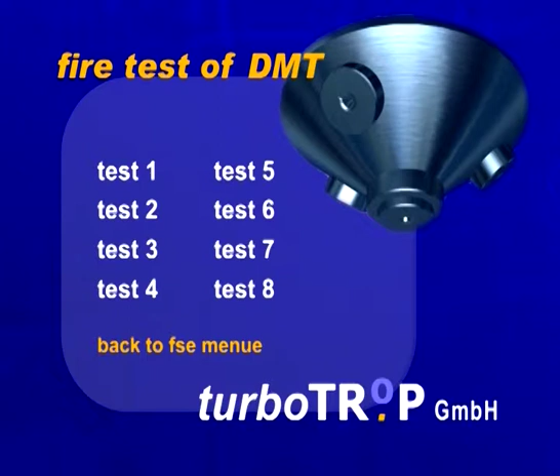The system that can save life. Several companies already decided to adopt our solution. Let yourself be persuaded that the fire barrier and smoke gas reduction with our fine spray extinguisher will be the decisive technology of the future.

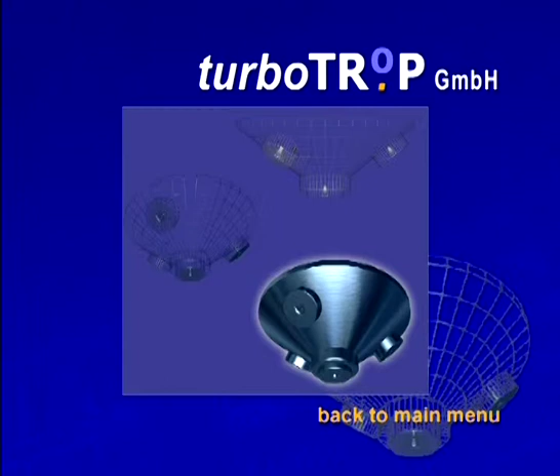Technical statements. The especially developed fog swirl nozzle stands at the center point of our fine spray extinguishing technology. It produces a fog with a droplet size of less than 1/10 of a millimeter. The fog is brought cubically into the area up to 6 meters by this so-called fog swirl nozzle. Due to a special swirling technology, even places difficult to reach by conventional extinguishing systems can easily be reached by fog.

By the way, our fire signalers react very early on fire, but through intelligent technology, they can especially well make a difference between a real fire and other smoke sources. Our system is effective at least 20 seconds after fire detection. At least after 30 seconds, extinguishing sections work with the necessary extinguishing agent intensity. Of course, initiation of extinguishing can also be done manually.

Through use of galvanized tubes and small place-saving water tanks, we have a compact system requiring little maintenance. A control unit for the water stand always cares for best filling of the unit. Moreover, with our system, water is not in the tubes, so rust formation is completely prevented.

With the help of these properties, we are able to recognize growing fire within the shortest time and take measures like smoke gas fog, firefighting, alarm to evacuate, and alarming rescue service.

Through this fine fog, use of water is largely reduced compared to other systems. It is friendly not only to the environment, but it also minimizes secondary damage caused by extinguishing agents.

Protect your sensitive equipment, products, documents, and of course, yourself. Numerous tests and research have confirmed it again and again. You can save money not only for installation or updating, but best protection of persons is also guaranteed.

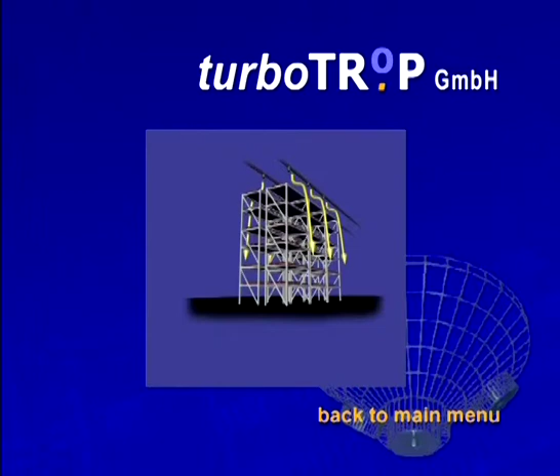High-rise storage rack. Due to several storage floors, one depends especially on an intelligent system to firefight in case of a high-rise storage rack. Using conventional extinguishing technology, one has to have nozzles in every storage level because otherwise the water should just flow at the sides. It only functions by a rigid order of stands. Disarranging is impossible through installed tubes.

That is not the case with fine spray extinguishing technology. Here, fewer nozzles are enough to protect safely and effectively from damage. Fog has the positive property to spread everywhere in the space, also between stand levels. If fire is growing in a level, it is stopped within a short time. Neighboring storage withstands this fire without any damage.

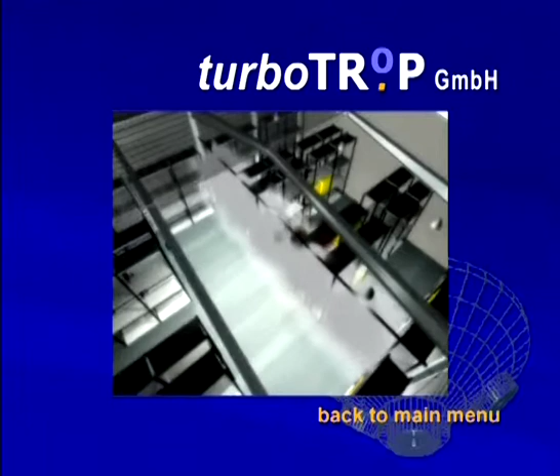Fire protection gates, walls, and number of nozzles. By planning a big storehouse, you are also in the position to do fully without constructing fire protection gates or intermediate walls by using a fine spray extinguisher. A lineup of connected order of nozzles in this case has the effect of a firewall. Grown fire can effectively be stopped and smoke cannot spread to other areas. Think how much better you can use your surfaces this way.

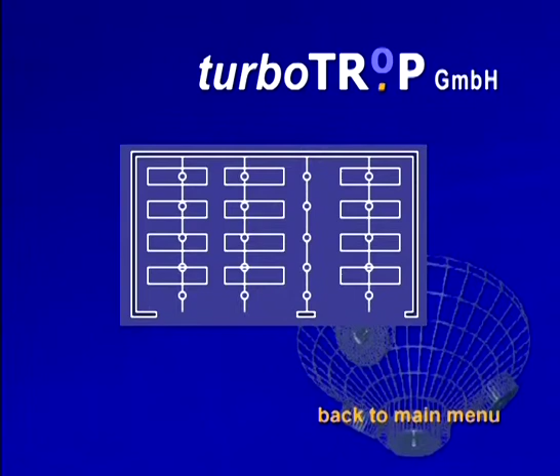To equip a complete hall, fewer nozzles are necessary than in the case of conventional extinguishing systems, since the fog swirl nozzle covers a wider area than all other systems. Through a precisely commanded signaling system, only zones are fogged where fire and smoke is detected.

Building with galleries. Construction directives say that buildings with open floors, for example like galleries, are to be protected technically against fire. As architect, there are fewer possibilities.

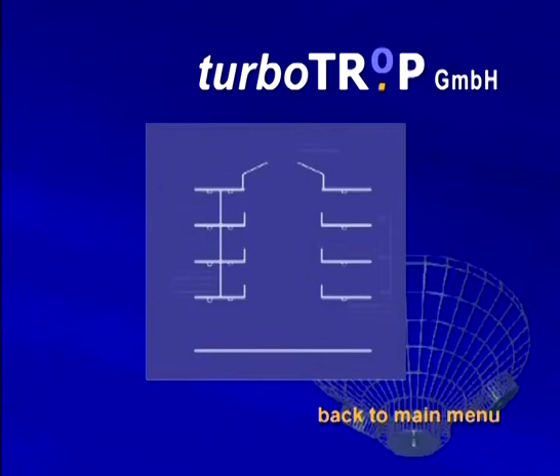There is the possibility to construct fire protection with glass later on. Of course, this enormously disturbs the open character of the building. Moreover, such special glass is very expensive given this quite big surface.

In case of new buildings, planning of such galleries is extremely limited. In case of doubt, it is made impossible to do it.

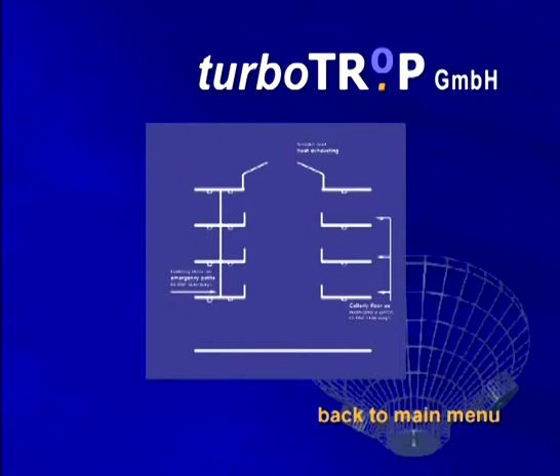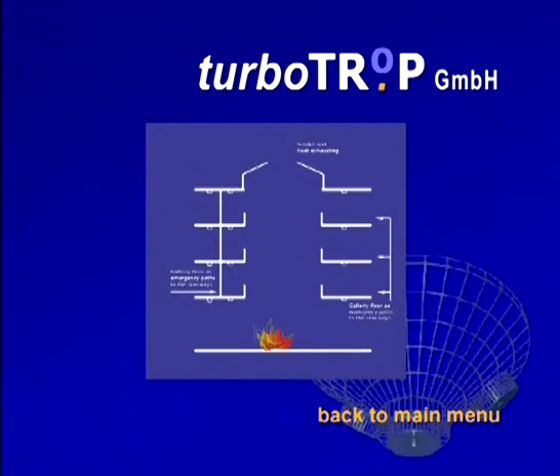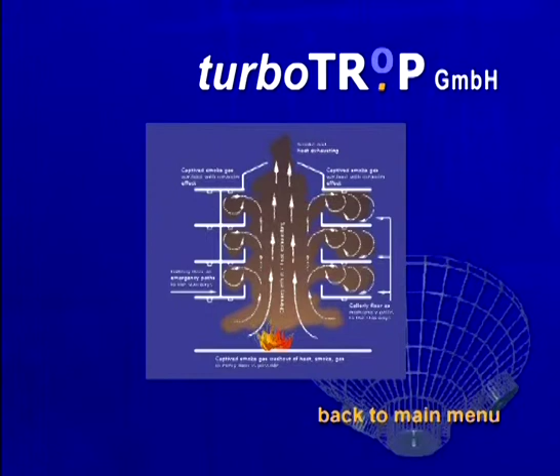Already 60 seconds after the fire breaks out, rescue possibilities are made remarkably difficult. Existing smoke exhausting also only reacts to a growth of temperature. In case of manual initiating of smoke exhausting, grown fire smoke can be exhausted from rescuing paths only with difficulty, as no fresh air is able to flow in.

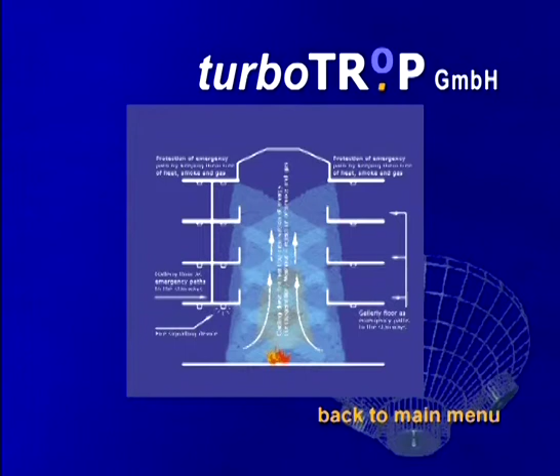It recognizes smallest smoke particles of a damaged fire. It releases an acoustical evacuation alarm and the extinguisher. At the same time, the fire brigade is alarmed.

Fumigating the rescue paths is surely prevented. Saving oneself and rescue from outside is made possible.

In case of updating an existing unit, only a fraction of costs, like in case of fire protection glass construction or similar constructional changes, will arise. With this extremely good price-performance relationship, our units are a precious contribution to cost abatement.

We will not save on security, but only on costs. Not least, this solution does not only leave more free margin in the matter of building construction, but also the freedom for more individual solutions.

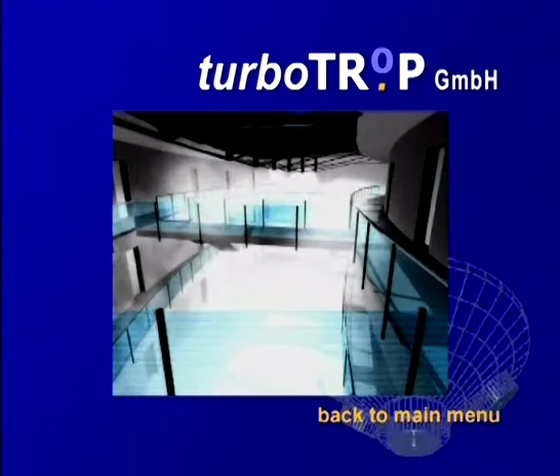Small office rooms. You can also plan our unit for firefighting in small office rooms. A single special nozzle is enough to protect an office up to 50 square meters.

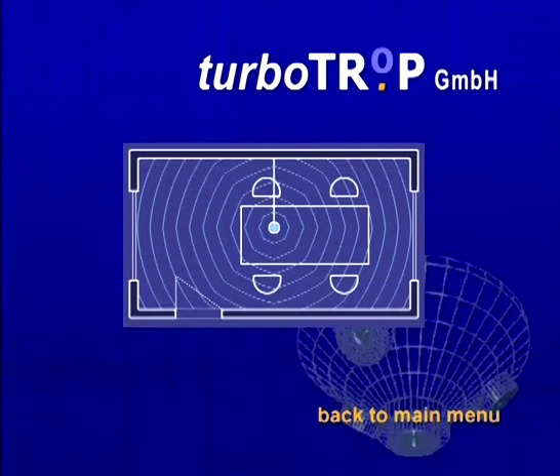Through turbulating swirl technology, the created fog reaches even fire in a hidden corner of the room or underneath the desk, and is able to react there quickly. Just through this special swirling, we surely reach a fire near the floor. The fog is pressed downwards in the room.

Technical statements. Through diminution of individual droplets to 1/10 of a millimeter, we achieve a very big water surface, so an enormous cooling reaction grows. The fog can quickly diminish the temperature of the fire, and a new initiation of other zones occurs slower. This creates freedom to move and time for necessary rescuing measures.

Through converting of water droplets, the volume is extended to 1,700 times. Now two things happen at the same time. A sudden evaporation of fine water droplets nearby the blaze leads to a stemming effect. The fog deoxygenates the fire.

In the mix zone of the blaze, it comes to an effect similar to a catalyst. The relationship of the reaction partners is disturbed by a quick diminution of oxygen in the blaze zone and its next surrounding, so the fire just extinguishes.

Moreover, fine water droplets are widely connected with growing smoke particles and then filtered effectively out of the danger zone. Escape and necessary rescue measures are not disturbed. The fog is completely harmless for persons.

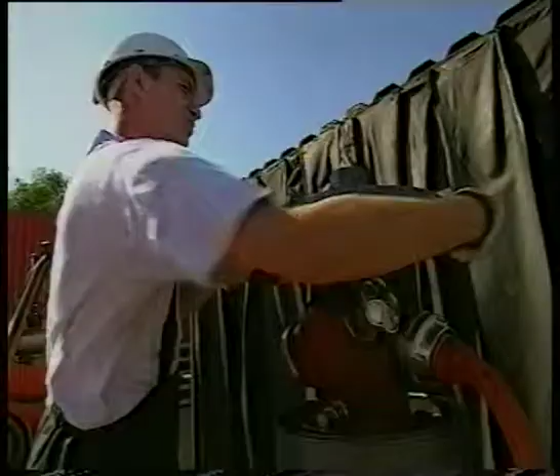Fires in public buildings, business establishments, and private residences can cause major financial loss, and in the worst instances, they may even cause serious injury. It's for these reasons that effective fire protection is of tremendous importance.

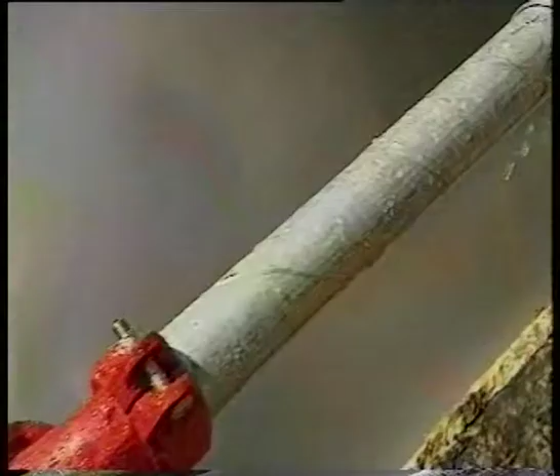Our fine spray extinctors guarantee highest safety, and at the same time, they create creative free areas. We conceived and developed this procedure from decades of experience with fire protection systems, and a system which unifies all important advantages is created.

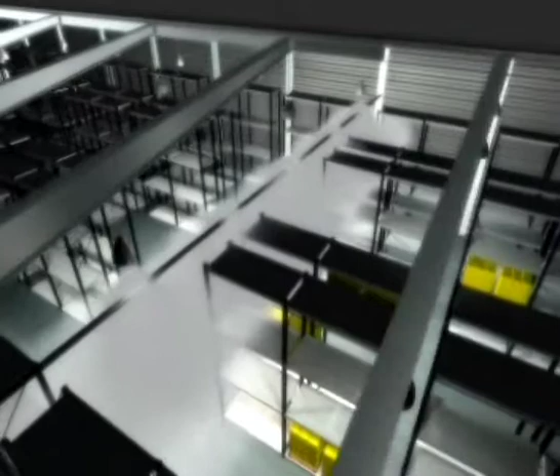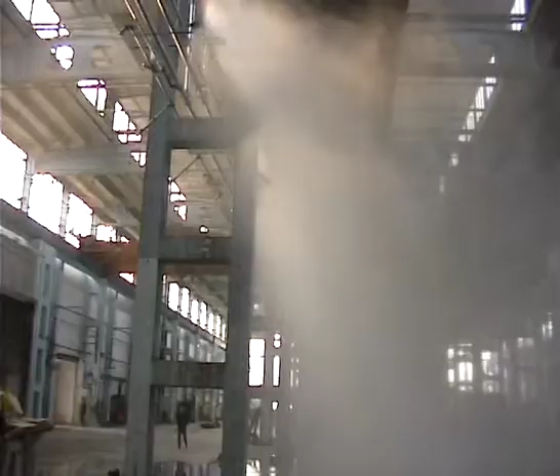Our fine spray extinctor uses a specially developed swirl nozzle, which produces a spray of water conveyed as far as 6 meters into the area with swirling, extremely fine droplets of water, thus preventing the fire from burning and fresh fire from breaking out.

The nozzles and the accompanying holders are always installed on the basis of an individually designed fire protection concept. Consequently, with every turboTROP system, the customer not only gains the advantages of outstanding technology, he also has the added benefit of more than 20 years fire protection experience.

The extremely fine droplets enable extensive combination of the extinguishing water with the particles of smoke emitted by the fire. This not only prevents the harmful effects of smoke poisoning, it enables firefighting and rescue work to be continued unimpeded by the development of smoke gas.

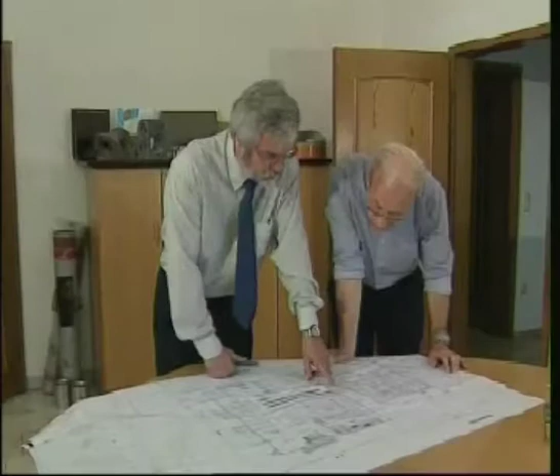Any fire protection system is ultimately only as good as the design concept on which it was planned.

The system comprises automatic fire alarms over the entire area to be protected, in order to ensure optimum functionality. The extinguishing section is triggered by a smoke-operated automatic and manual fire alarm. The multi-range fire alarm cuts in after 2 alarms. The extinguishing operation, commencing with the second alarm, is triggered.

The extinguishing section is operated after no more than 20 seconds from first detection. The extinguishing section operates at the requisite intensity no more than 30 seconds from detection of the fire. The simultaneous effect of water atomization from all nozzles in the section is ensured within 10 seconds.

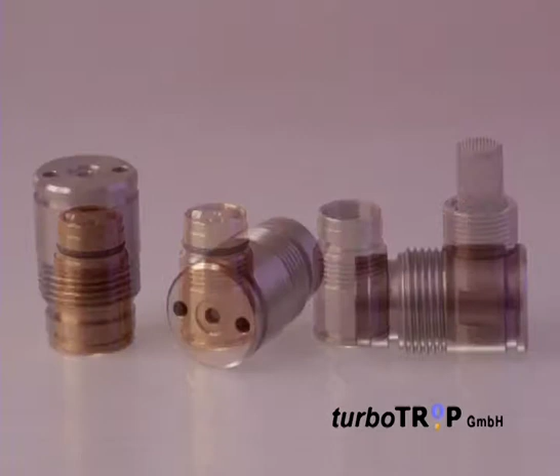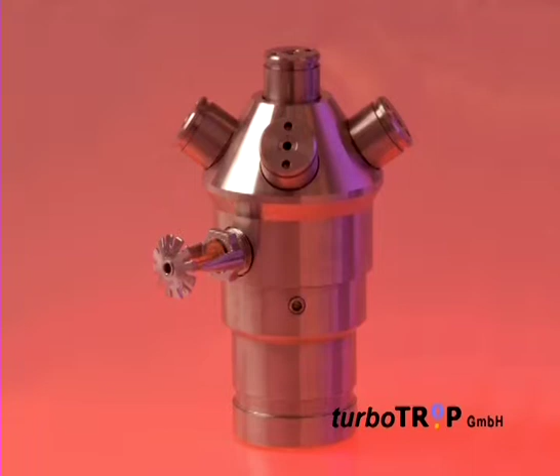The specially developed extinguishing nozzle, with which water droplets less than 0.1 millimeter in size are produced, has a central role in this system. The spray generated in this way has an extremely effective cooling action and will even reach burning items in places that are not easily accessible.

The high efficiency of the systems also means that structural measures which restrict creativity in designing buildings can be dispensed with. And greater freedom means far more original solutions.

With an extremely good price-performance ratio, our systems offer a valuable contribution to curbing costs. Safety is not reduced, only the cost.